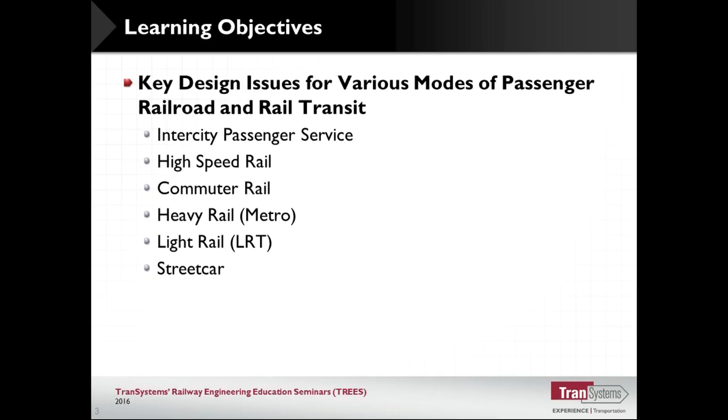First we're going to talk about intercity passenger service. All intercity trains in the United States are operated by Amtrak with their own trains, their own crews. Of course, it's an FRA railroad, all regulated by the Federal Railroad Administration.

The services are operated in really three different ways. There's regional service, and those are routes less than 750 miles, and they operate the Northeast Corridor, Boston to Washington, with a branch out to Harrisburg, owned by Amtrak. It's by far the biggest single asset owned by Amtrak. It's all electrified, and the top speed on this part of the railroad is 150 miles an hour.

This section in New Jersey is in the process of being raised to 160. Most stations have high-level platforms, that's 48 inches above top of rail, to allow level boarding with conventional single-deck passenger cars.

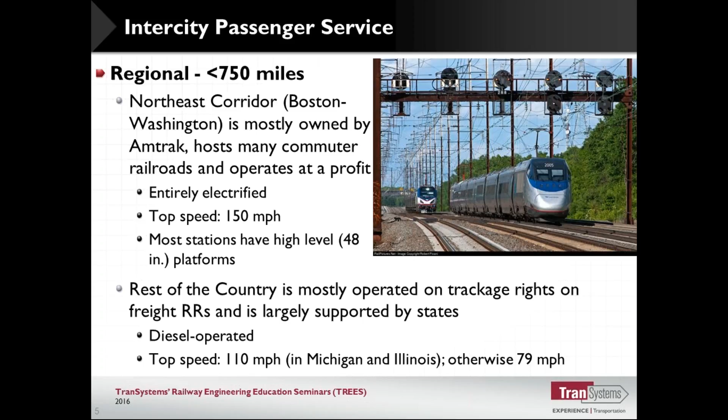In the rest of the country, the passenger trains are diesel operated, and the top speed in Michigan and Illinois is 110 miles an hour in some sections. Otherwise, as a generality, the top speed of all the Amtrak routes is typically 79 miles per hour. There's a history behind that being 79 versus 80, not worth getting into. And then the other part of the Amtrak operation, the third leg of the stool if you will, is the long-distance trains.

These are overnight trains. They operate through multiple states. The biggest concentration of them is in Chicago, where 8 of the 13 originate. There's overnight, 2-night trains that go to the West Coast, Seattle and Portland, San Francisco, Los Angeles, and then 1-night trains that go to New York and Washington.

The long-distance trains generally operate 1 train a day, and they operate almost entirely over the freight railroads, except of course in Chicago itself, where Amtrak owns Union Station and the associated tracks in the vicinity of the station.

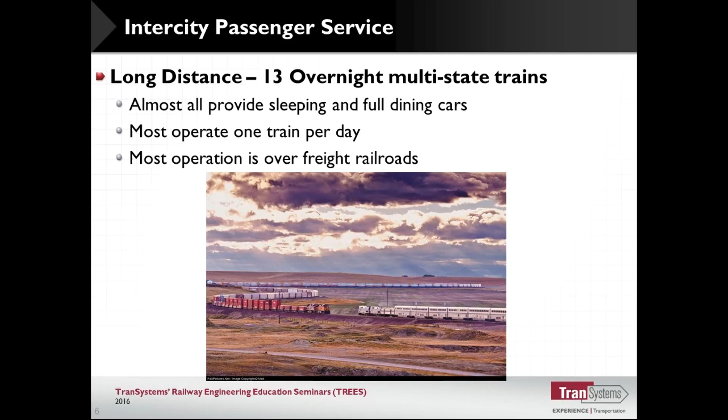So the equipment varies. On the Northeast Corridor, there's the Acela trains, high-speed trains for regional service. The other typical train for the long-distance trains are the double-deck Superliner trains used out of Chicago and on some of the other routes for long-distance service. There's coaches and sleeping cars and dining cars and lounge cars with the sightseeing roof, and some equipment that in many ways is the envy of the world.

But these Superliners are getting old. They're typically about 30 years old now, so they're going to have to be replaced in the not too distant future. The Acela trains - Amtrak is in the process of procuring a replacement for those trains too. Those are not young either, and they don't have enough of them. So that's the dual purpose of that procurement.

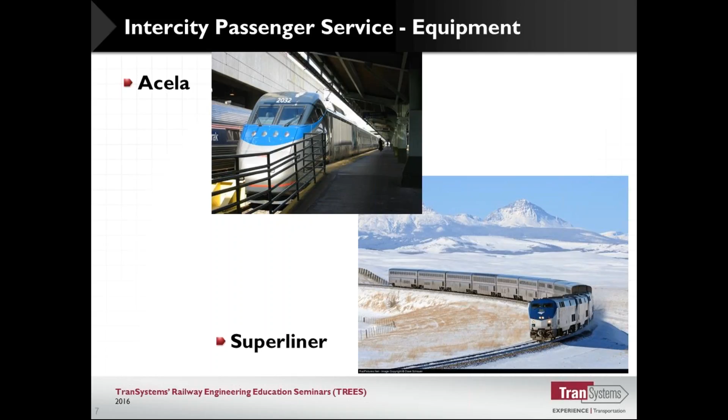The regional service operates with a lot more variety of equipment. The most common in the Midwest currently is the single-deck trains that you see over here on the right, and trains like that also operate in New England and New York State. Then in California, there's these double-deck cars, kind of like Superliners but not exactly the same - the Surfliners that you see there.

And cars of that design were ordered under an ARRA grant for both the Midwest and more cars for California. Unfortunately, there's been a problem with the design of those cars - they've failed an FRA compression test, so it's not exactly clear what's going to happen. The funding has a sunset provision to it as an ARRA contract, so it's not clear what's going to happen on that. That's a very tricky situation right now.

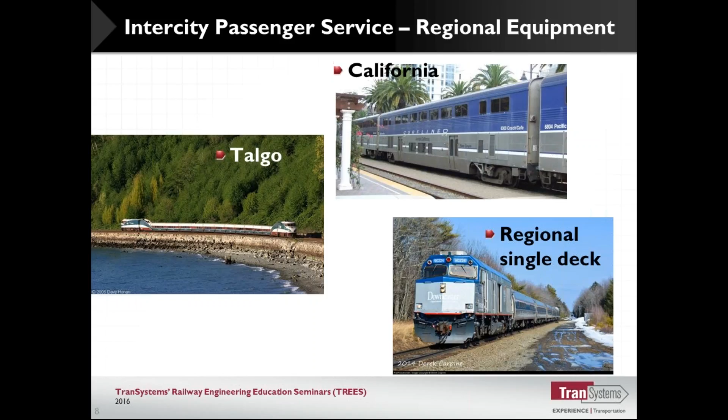And then on the left, you see the Talgo trains. These are operated in the Northwest between Vancouver, Seattle, Portland, and down to Eugene, Oregon. That service is operated exclusively with these Talgo trains. They are a Spanish design, and they tilt on the curves, which allows them to go through the curves faster.

So just to talk about concepts, the various design issues.

Speed limits for passenger trains are always set higher than freight trains. An important factor is that the top speed through grade crossings is effectively 110 miles per hour. Sometimes you see references to 125, but that's not the requirement. To get the FRA to allow you to do 125 through grade crossings, the requirements are so complex that nobody has even attempted it. So you have to accept the fact that the limit for going through grade crossings is 110. And even to get to 110, there are very stringent requirements - effectively, you have to meet the same requirements as quiet zones, if you've encountered that issue.

Now, super elevation is a big deal. It needs to be set differently because the trains are running at higher speeds. The super elevation really should be set higher on passenger routes than on freight routes. This is an ongoing source of friction - no pun intended - between the owning freight railroads and the passenger railroads. So that can be a big issue.

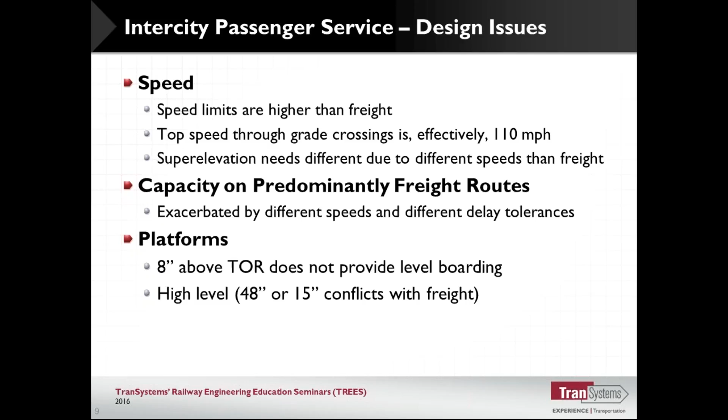You have a whole other presentation on high-speed rail, so I'm not going to get into the details. But from a policy perspective, there are a few things to keep in mind. First, what is high-speed rail? As defined in the United States, it's railroads that operate at more than 150 miles per hour as a cruising speed. In the rest of the world, a common threshold is 300 kilometers per hour, which is 186 miles per hour, and 350 kilometers per hour is not unheard of.

There's several places that's operated at 220 miles per hour, and so that's a real game changer. That's obviously much faster than driving.

What's been found, I think fairly universally, is that trains can be very competitive in markets where they can get between cities in 3 or 4 hours or less. They can still be very competitive where they get between cities in 5 hours or less. They make a very substantial dent in air service in those markets, and of course in automobile usage.

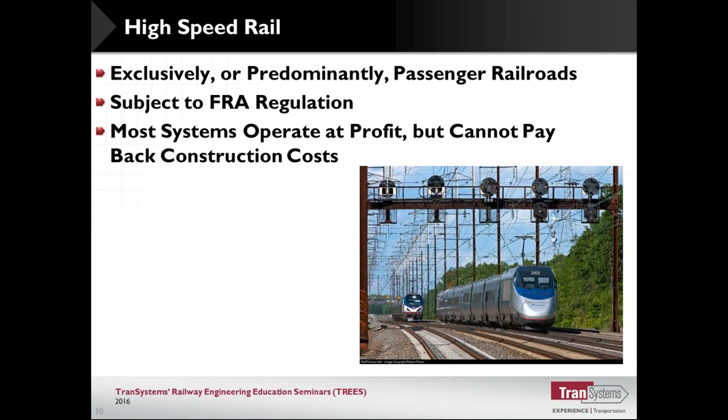They will, however, I don't think there's any place in the world where they actually pay back all of their construction costs. If you're real lucky, they may pay for a new set of equipment eventually. Generally speaking, it's considered good that they cover all their operating costs, and some have paid a portion of their construction costs, but I hate to put a number on it, maybe a quarter if you're in really good corridors.

Okay, that's intercity, and I spent a lot of time on that. We'll go through some of these others a little bit faster probably. Commuter railroads serve all the larger United States cities. They're all publicly owned, but they may not be publicly operated. There are third-party contractors that operate several, we'll talk about that in a couple minutes.

The track ownership can be by a public agency, possibly the same agency that's operating the trains. Amtrak owns the Northeast Corridor, and there's a lot of commuter operations there. In that case, there's half a dozen public agencies that operate on Amtrak tracks in the Northeast Corridor. And of course, there's a number of freight railroads that own the track that commuter trains operate on.

So the operation can either be by the public agency owner, or under contract, sometimes by the freight railroad that owns the track. In Chicago, we have two notable examples of that. The BNSF operates a very big commuter operation out to Aurora, and the trains all say Metra on them, but the train crews wear uniforms that say Metra while the employees actually get a paycheck from BNSF. A similar situation applies on the three lines owned by the Union Pacific, former Chicago and Northwestern routes, but there are other routes

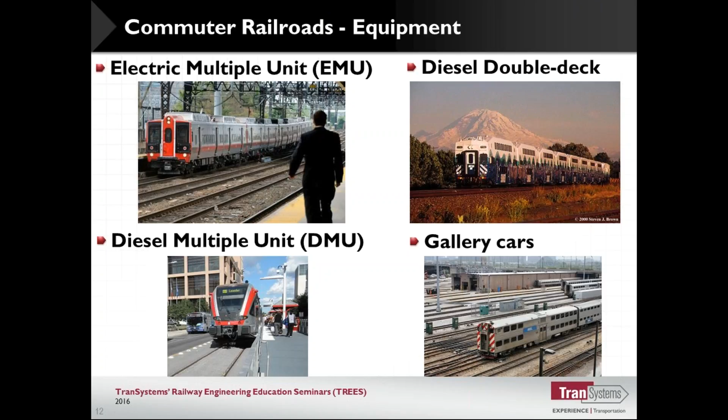Again, the design issues are speed, and there's the super elevation issues I mentioned that vary from freight trains, and grades. There are commuter rail operations that operate with up to 4% grades in passenger-only situations. Railroads won't accept 4% grades for freight operations, although I am aware of at least one case where a passenger railroad built a 4% grade, and a freight railroad went ahead and started operating some of their intermodal trains over that. Kind of interesting.

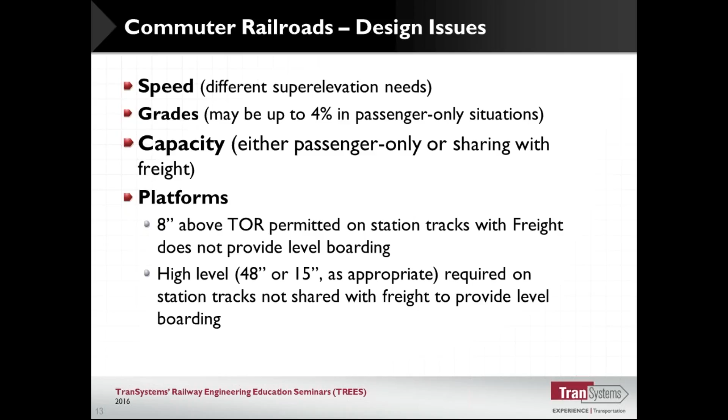And capacity is obviously a big issue. Then we get into the same level boarding requirements. Those same FRA Department of Transportation requirements for level boarding apply, as we talked about previously. Again, 8 inches above top of rail is common, but in the Northeast Corridor, where the bulk of commuter rail operations are, it's 48 inches.

Then we have heavy rail transit, sometimes referred to as Metro, and these are separate systems. They're not interchangeable with the freight railroads, and they do not have any freight operation. They typically operate with third rail, although there are a couple of examples using overhead wire. There are exceptions to every rule, but generally speaking, they have no grade crossings. They do all operate with high-level platforms, I don't think there are any exceptions to that, and lots of tunnels and structures, which is how they avoid grade crossings.

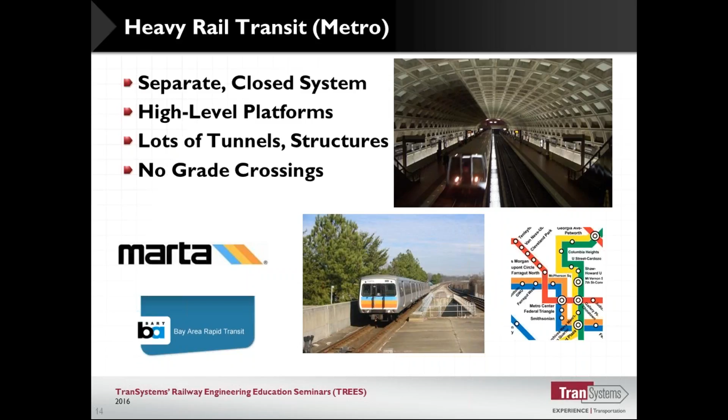10-car trains are common, but sometimes as few as 1 or 2 cars also. It happens in some other cities, like Cleveland, which operates a lot of 1-car trains.

So they use third rail power, except in New York, which I think now is the only exception. They all use single-person crews—oh, Boston may be another exception. They all pretty much use turnstile fare collection, so there's no onboard fare collection. And in most cases, all axles are powered, which is why they can easily do 4% grades.

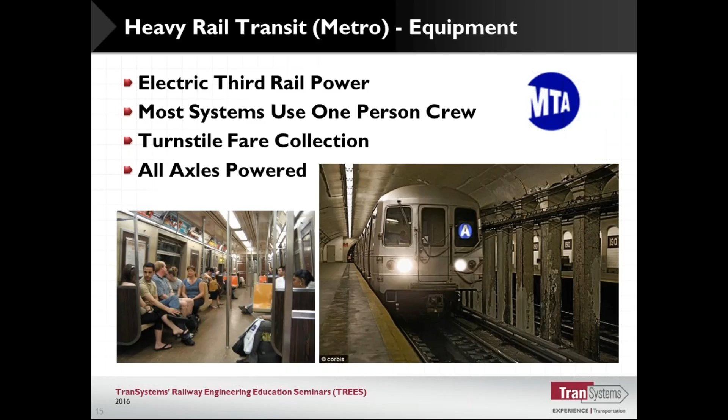I think there's a couple that have grades higher than that. A typical top speed on these systems is 55. We talked about grades—they have a lot of capacity with these 10-car trains, and of course they typically operate with more standing passengers than seated passengers in the peak hour, and can operate as close to each other as every 2 minutes. So you can imagine a 10-car train operating 30 trains an hour with standing loads can carry a lot of people. The rule of thumb often quoted is 40,000 people per hour per direction—a lot of people.

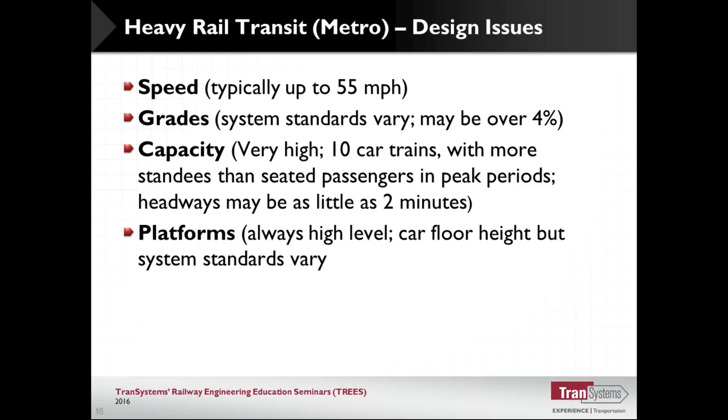And we talked about platforms. Okay, the next mode we're going to talk about—notice we're on kind of a continuum here—is light rail. This is a mode that, as a separately defined mode, has really only existed in the United States since 1981. San Diego was the first system.

What defines light rail is that it has dedicated lanes or separate tracks. On the right is regular railroad-looking ballasted track, but on the left you see it operating in the middle of the street, but on dedicated lanes.

On the left, they operate through signalized intersections like this, and they have to respect the traffic signals. If that traffic light turns red, that train will stop. Now they typically get signal priority in most cities, so they'll only get a red light if something doesn't work properly. But they are subject to traffic lights.

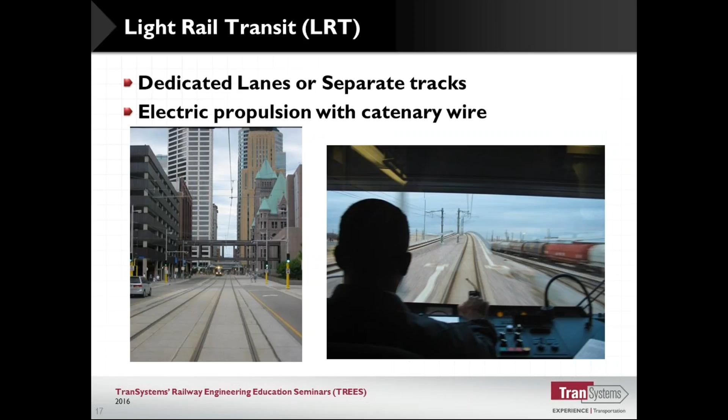The newer systems provide level boarding with low-level platforms which matches the height of the floor of the cars. Sometimes the cars may have steps inside, so part of the car will be low floor and the other part over the trucks will be a higher floor. So the platforms are about 12 inches on those systems.

Grade crossings are quite common, and sometimes they may operate with gates. You see on the left here, and in fact both these examples are controlled by crossing gates. Sometimes they use crossing gates, sometimes traffic signals, depending on the system policy and the particular conditions at the intersection. A lot depends on sight lines.

The length of trains is generally limited to what will fit within a block, so that if the train stops, they should not be blocking cross streets. So that's typically about 3-car trains are the limit. But the trains consist of articulated cars that bend in the middle, so those can be fairly long cars.

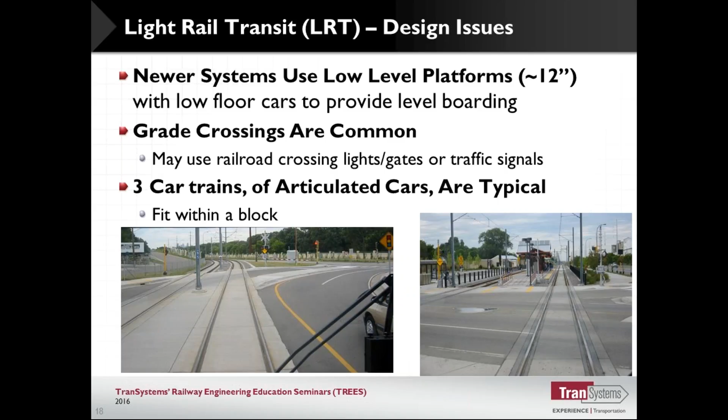6% grades are fairly common on these light rail systems, and almost all of them use proof of payment fare collection. These stations with 12-inch platforms that are just kind of in the middle of the street, you can't install turnstiles and have them be effective. So they accept that, and take advantage of it by having access from multiple directions to these stations.

I made a note here that platforms often actually serve as the sidewalk, so you really can't control access to that platform.

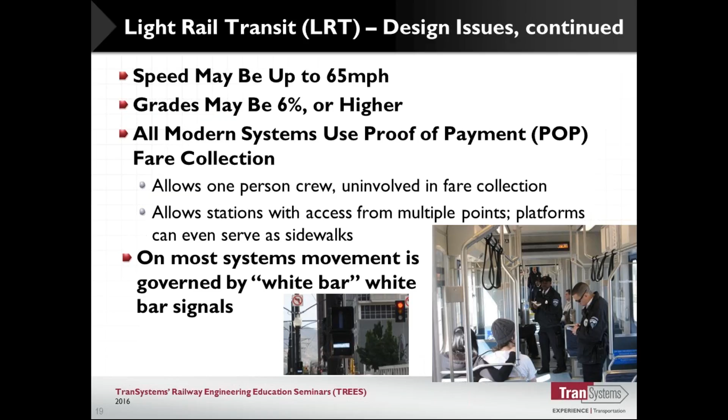There's a few cases, like a handful, where there are diesel light rail trains. These are usually light rail trains that do not meet FRA crash compression standards. So the way the FRA ensures safety is that these operations have to apply for a waiver, and generally the way you get a waiver is that you promise, and have to have systems to enforce that you'll not share track at the same time. This is called temporal separation.

Here on the left, it's in Austin, Texas. Part of the operation may be in the street, and it's not actually shared with freight trains. So there may be a mixture, some passenger-only segments with mixed segments.

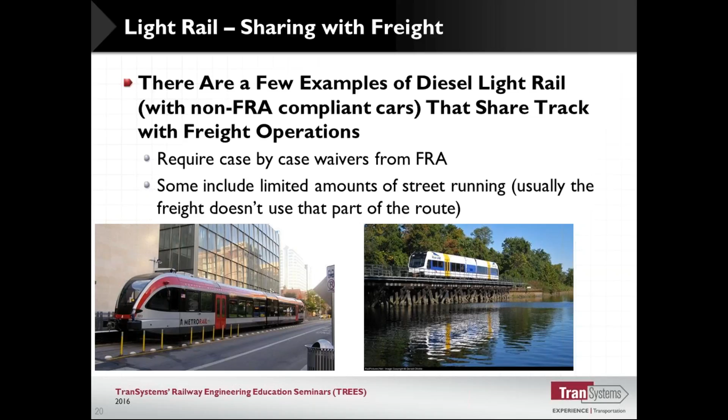Okay, so finally we get to streetcars, and this is what light rail evolved from. This technology goes back to the late 1800s, and you notice that these cars, none of them have couplers. Again, there's exceptions to everything, but most of these systems operate with single cars, although the modern one you see on the right is articulated, so it's a little longer than a traditional streetcar.

These cars are 45, 50 feet long. The articulated ones may be a bit longer, and they operate in the street, and in many places they may actually share a lane with mixed traffic with automobiles.

Curves on these systems, because the cars are so short, can be very tight. 40-foot radius curves are not unheard of, so for people used to railroad design, that can look pretty strange. And these systems, almost all of them historically, until recently, operated with overhead wire.

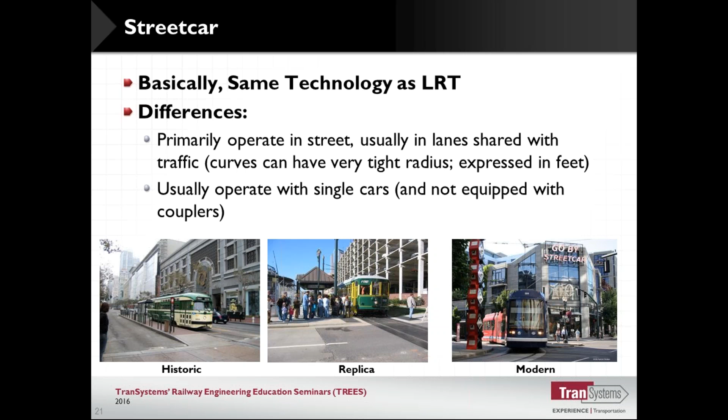Overhead wire - these operate generally with streetcar systems with just a wire with no messenger. This is why it's called trolley wire, because way back when, the original ones actually had a little troller that rolled along the top of the wire. That didn't last very long, but the name stuck. So that's why these are called streetcars or trolleys in a lot of cities, and that's called the trolley wire.

And you may have noticed, I should have pointed out that on these other systems with light rail, where there's higher speed operations, and obviously Amtrak in the Northeast Corridor, they use a messenger wire that supports that wire.

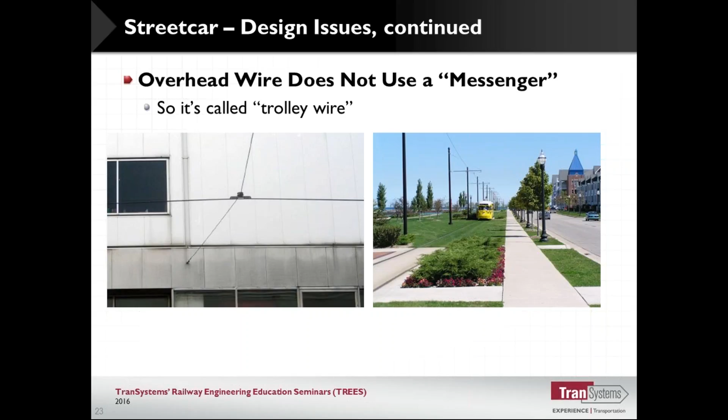So the streetcar's track is very different from standard track. I mean, streetcars can operate on standard track with ties and rail, but the real focus is, of course, on their operation in street, and so the track is embedded in the street, typically embedded in concrete, and some very special rail profiles are used for that.

Most common, on the left in this picture, is girder rail, and you see the little protection for the flangeway that's built into the rail. On the right there's a newer concept called tram rail, and that also has a protected flangeway, so these are designed to be embedded in concrete.

Then you see in the picture here on the left rail, there's like a rubber boot installed between the concrete and the steel rail, and that's something that's evolved over the past few years to prevent stray currents from migrating from the streetcar rail. The negative return - this is DC traction.

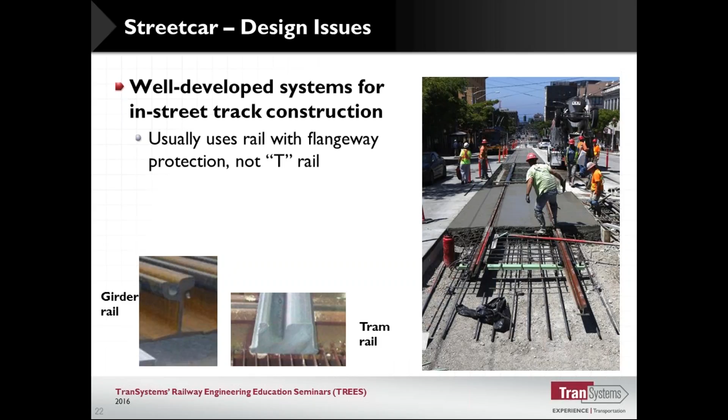So there's two different types of current collection. The historic is on the left, a trolley pole, and then on the right you see the pantograph - that's the more modern concept. It's simpler to use, it can go in either direction, and they're a little more expensive, but it's simpler to use.

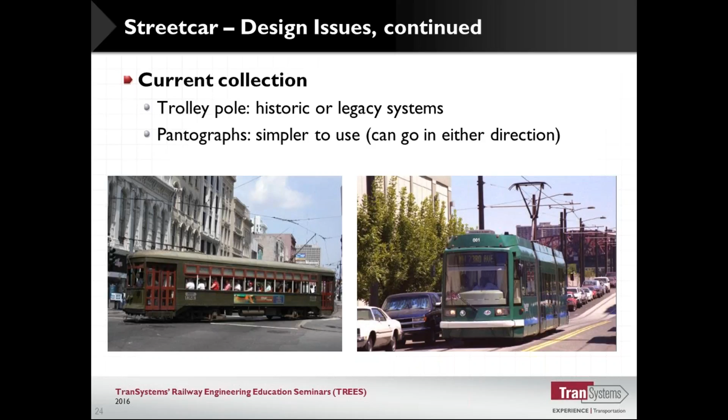All right, I had said that we were going to do another break in there, but we didn't. So it's 53 - yeah, I guess I did take a little bit longer, so I didn't rush through quite as quickly as I have in some last year. But I'd be happy to answer any questions now.

Hey David, I have a question. On the street cars, do the rails have to be cleaned out? Since they're not a T-rail?

You mean the flangeways? Yeah, well, the biggest risk is in cold weather climates. It's easy to get accumulations of ice in the flangeway, and so you can find your streetcar wandering off down the street instead of staying on the track. I mean, they are generally heavy enough to break up the ice, but it can be an issue.

And of course, yeah, you can have dirt accumulate in there, but rarely does it require cleaning out as such.